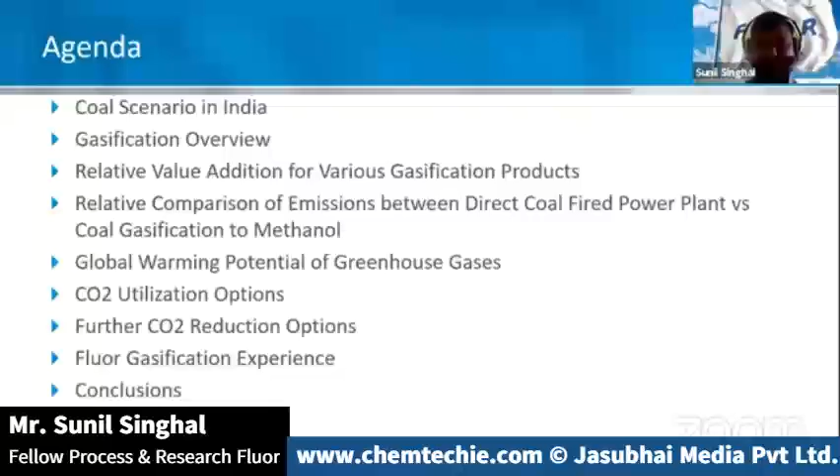So the coal scenario in India: this is a very well-known fact that India has the fourth largest coal reserve in the world, about 350 billion metric tons. We are at the same time the largest consumer as well as the second largest producer of coal in the world.

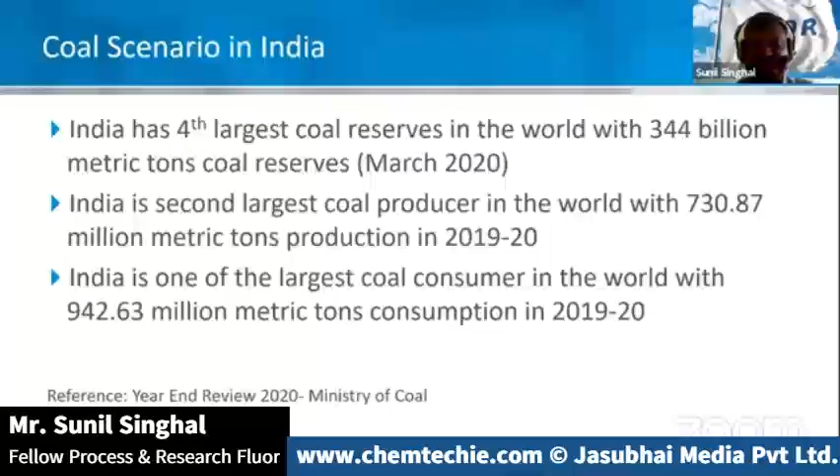So what is the drawback? The majority of Indian coal is low grade with very high ash content, and the presence of fluorides makes it very difficult to deal with. It also has a very high ash fusion temperature, which makes it quite difficult to gasify because you need very high temperatures. Most of this low-grade, non-coking coal is used for power generation using direct-fired boilers, which directly adds all the carbon in the coal in the form of CO2 into the atmosphere.

But the positive side is that coal does not have a direct parity with other fuels such as crude oil or natural gas. It has its own market, which is dependent on its own supply and demand situation.

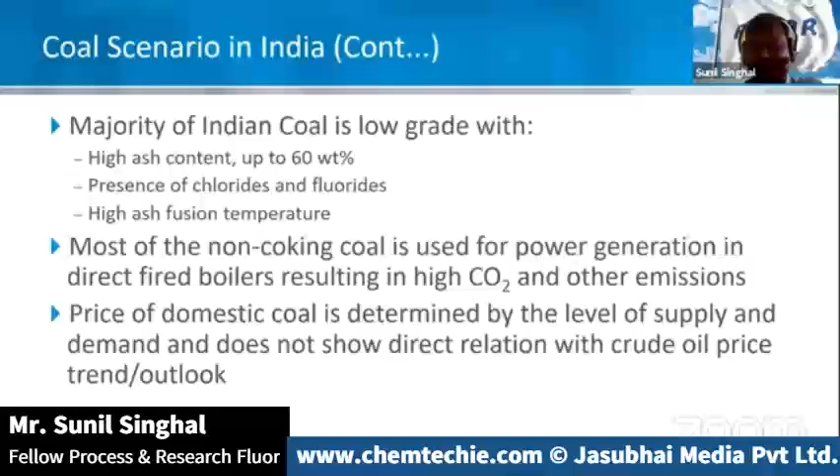A little bit about the stats: 70% of coal used in India, in thermal power plants, accounts for close to 50% of CO2 and SOx emissions, about 30% of NOx, and 15% of PM 2.5 - all dangerous species. The Indian coal fleet emitted 1.1 gigatons of CO2 in 2019, and of course contributed to poor air quality and all kinds of emissions in SOx, NOx, and particulate matter, impacting health, economy, and ecology directly or indirectly.

So what is the clean solution? We are sitting on abundant coal reserves, and yet we're still importing almost 80% of our energy needs through crude oil or natural gas. So with the emerging concerns over CO2 emissions and other pollutants such as NOx, how do we use this abundant coal in a cleaner way? I believe the potential cleaner solution is gasification.

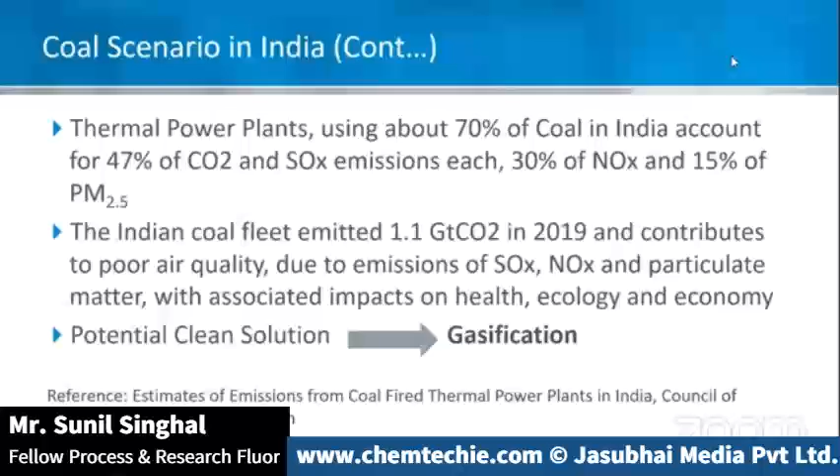Gasification is basically the reaction of the feedstock with oxygen and steam at high temperature. The primary gasification reactions aim to produce carbon monoxide and hydrogen. In addition, there are some side reactions, such as the water gas shift reaction and methanation, which produce CO2 and methane. Typical conditions are 900 to 2000 degrees Celsius, and pressure could be atmospheric to about 85 bar gauge.

In addition to the main hydrogen and CO, which is called synthesis gas, in the coal gasification process, the nitrogen present in the coal, as well as the nitrogen that comes with oxygen, is converted into nitrogen, ammonia, or HCN, depending on the gasifier operating conditions. Sulfur is converted into H2S, COS, and CS2. And then, as I talked about earlier, there's chloride, fluoride, and some metals like mercury and arsenic - those also end up in the syngas.

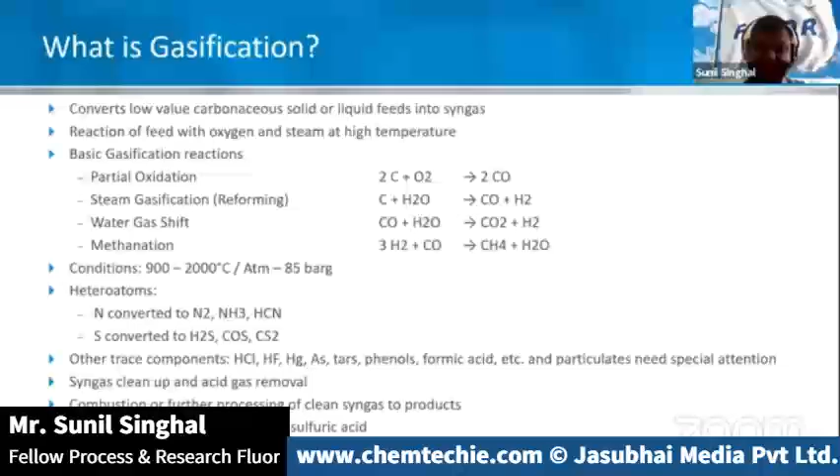Those things need special attention, and the design needs to take care of them. Otherwise, they can create a lot of problems in downstream processes. So we've got syngas cleanup and acid gas removal steps, and then the end product depends on what it is. If it's syngas, it could go to direct combustion using the IGCC route to make power, or syngas to make other products. Sulfur gives an opportunity in this case to be captured in the form of elemental sulfur or sulfuric acid, as opposed to SOx in the case of boilers.

Feedstock-wise, gasification is very versatile and can take a wide variety of feedstocks, including high-ash Indian coal, petcoke, other refinery residues such as vacuum bottoms, asphaltenes, acid-soluble oils, and also various biomass such as municipal waste, woody biomass, agricultural waste, industrial hazardous wastes, and even medical wastes.

It's very important, considering there are all kinds of species present in the feedstock, to understand the feedstock in order to pick up the right technology, the right syngas cleanup steps, and the right gasification plant configuration.

Some of the key parameters are the heating value (LHV), moisture content of the coal, ash content, and ash composition. These determine the composition of the bottom ash or slag from the gasifier, and the split of ash components, some of which get carried over in the syngas. Then there's the melting temperature, and most important—often ignored if you're not experienced enough—the trace components.

These trace components may be at ppm levels but are very dangerous to deal with. You need to pay special attention even down to the ppm levels of mercury, arsenic, sodium, potassium, chloride, fluorides, and other halides. And of course the grinding index, since hardness is measured in terms of the Hardgrove grindability index or the Bond index.

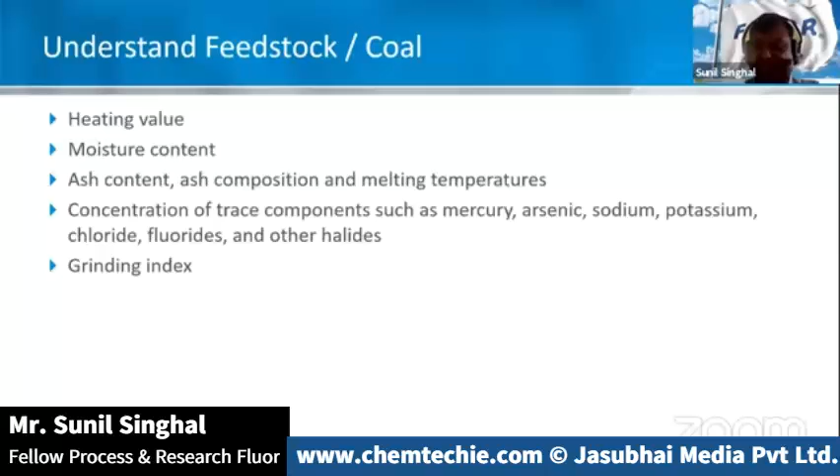Here is a simplified overview of the key process steps in the gasification process. We have an air separation unit which provides pure oxygen, close to 99.5% or higher purity, for gasification.

Then we have the gasification block itself along with heat recovery. Heat recovery is optional depending on the technology—it could be a direct quench or a heat recovery steam generation option.

Then the raw syngas that comes out of the gasifier, after cooling, needs to be scrubbed for any chloride or fluorides. Conditioning essentially means the shifting, or the COS hydrolysis, depending on what the end use is.

After conditioning, it goes through the acid gas removal step. If mercury is present, there is a mercury removal step before acid gas removal as well.

Acid gas removal separates sulfur and CO2. Sulfur is separated as H2S, which could be further processed to make sulfuric acid or elemental sulfur. The beauty of this CO2 is that it's concentrated, essentially pure CO2, so it does not need to be captured.

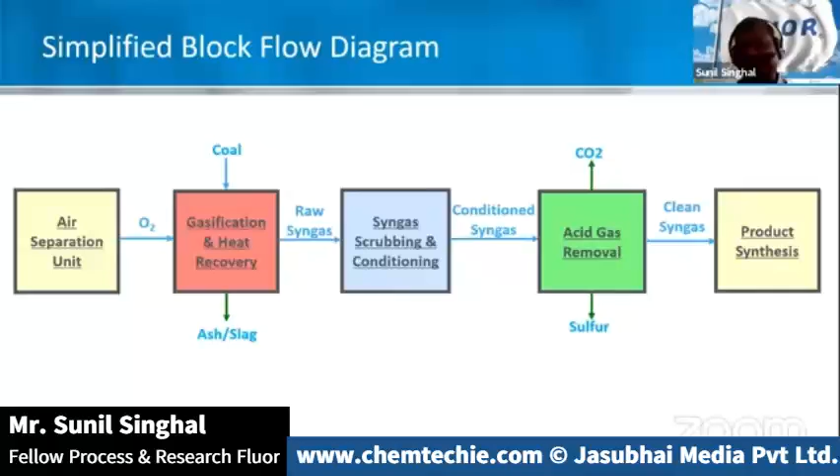Clean syngas can then be used to make a variety of products. Regarding gasification technology options, there are a number of options, primarily categorized into three main categories: fixed or moving bed, fluidized bed, and entrained bed.

Fixed and moving bed has very high residence time, fluidized bed is somewhere in between, and entrained bed has very little residence time. Based on the flow profile, you can see the feedstock size becomes finer and finer as we go from fixed bed towards entrained bed.

The oxidant could be air or oxygen, depending on the end use. In entrained bed, it is mostly oxygen, because you have to heat the coal to very high temperatures to melt the ash. If you use air, a lot of your energy goes into heating the nitrogen that comes along with it, meaning a lot of additional CO2 generation.

Ash handling could be slagging or non-slagging. Fixed bed has both slagging and non-slagging options, fluidized bed is non-slagging, and entrained bed is always slagging. Here is a list of commercially available technologies in the market.

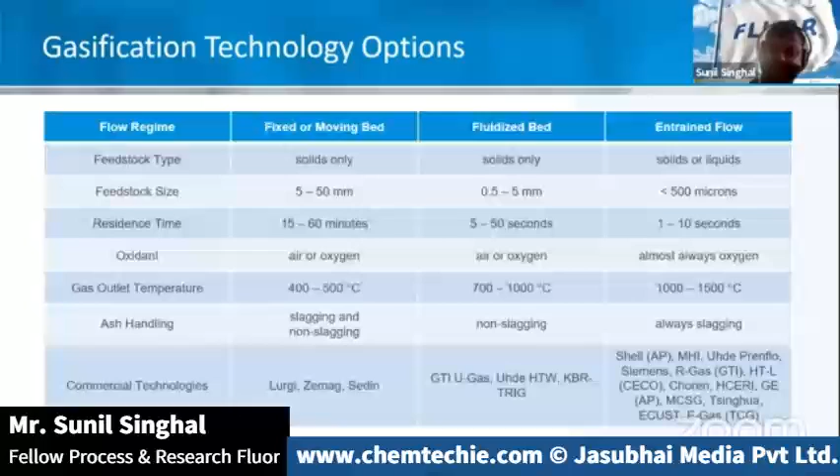Once you reach the syngas stage, you've opened the door to a number of products you can synthesize from it, including direct use of syngas for power and steam, using syngas for direct reduction of iron, as well as using syngas directly as oxo-gas for oxo-chemical synthesis.

It's also a source of hydrogen for refineries and oil sands projects. Oil sands is not applicable in India, but it can still be used as a source of hydrogen for refineries, such as Reliance is using. Then there are all kinds of liquid fuels, synthetic natural gas, methanol—which again opens the door for various derivatives—and fertilizers.

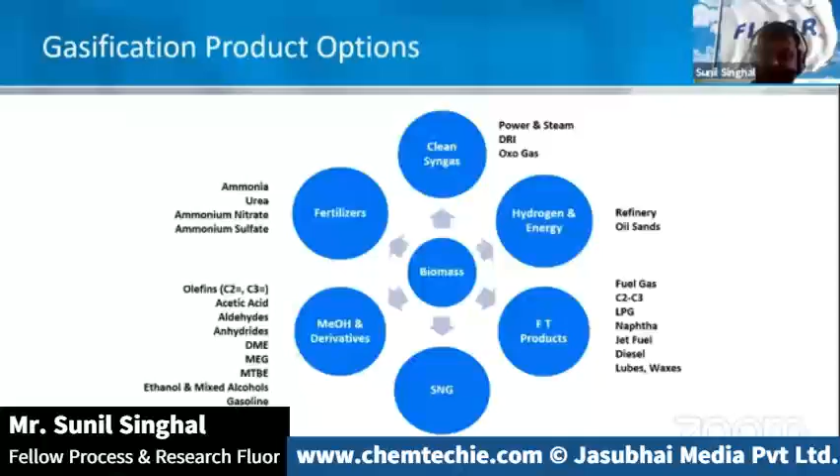This may be of interest to you: I've tried to compare the value addition of various products with respect to the cost of coal. Fluor has come up with a way to simplify things—$1 per million BTU corresponding to $1 per ton or $1 per liter prices. On an energy basis, you can see the value addition.

To summarize this slide: for coal converted to anything you synthesize, the highest value addition is essentially where you get paid for your carbon as well as for the oxygen. The moment you go into the rejection process of carbon or oxygen, your value addition drops.

So basically, what I'm trying to say is make the oxygenated products and the products which are rich in carbon, so you can lock most of the carbon in the coal into the product. That way you also help the environment by locking most of the carbon in the coal into the products and reducing CO2 emissions to the atmosphere.

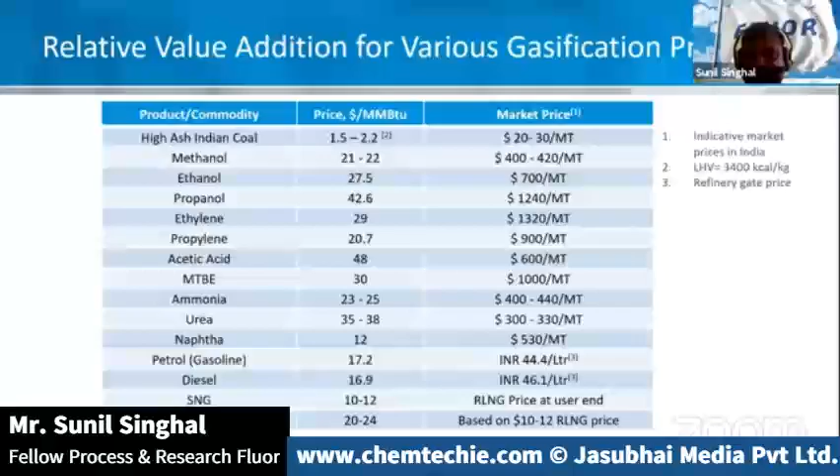Okay, so this is a small comparison about how 1 million ton of coal processed in a coal-fired power plant versus the same amount of coal processed to produce methanol. You can see the CO2 emission, there is close to a 30% reduction in CO2 when you process 1 million ton coal to make methanol instead of power.

SOx emissions become almost nil versus quite significant in coal-fired power plants. Similar is the story with NOx. And for mercury, chlorides, fluorides, particulates, there is essentially no way to capture them in the flue gas. While in gasification, they are captured in the purification process and do not pose any environmental hazard. Even the ash content gets reduced quite significantly.

Because in coal-fired power plants, the carbon conversion is much poorer compared to gasification plants. In addition, for coal-fired power plants, in this case, I've compared the circulating fluidized bed boiler. There, if the sulfur is high, you need to use limestone as well, so that limestone also ends up in the ash. That's why ash content is very high.

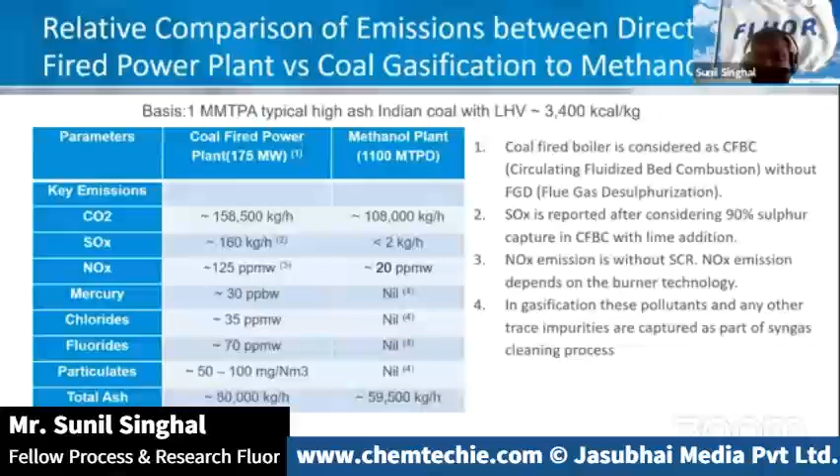This slide talks about the greenhouse potential of various gases. Carbon dioxide, when measured, is measured on a scale of 1. Methane is 25 times more potent. Nitrous oxide is 298 times. VOC is 3.12 times, and carbon monoxide 1.57 times.

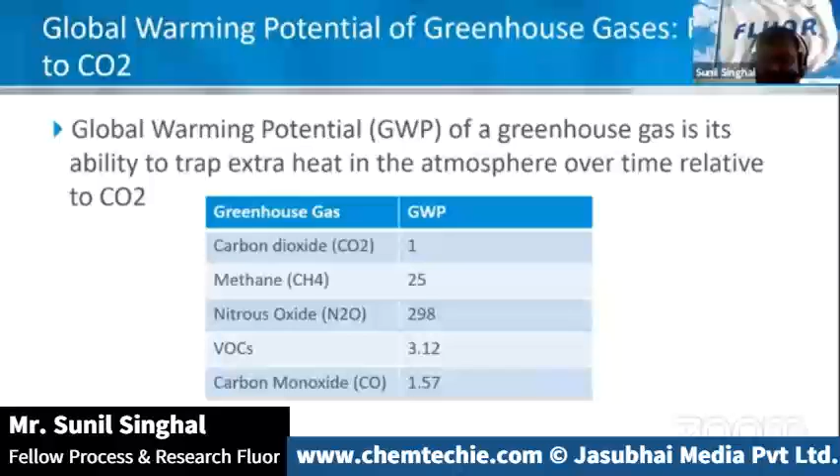Specifically in this case, coal emits coal bed methane, and even landfill sites used for dumping garbage emit a lot of methane. Methane emission is 25 times, so 1 mole of methane is equal to 25 moles of CO2. Similar is the story with NOx. There are other pollutants also that contribute quite significantly, even though they are emitted in small quantities.

Sunil, can you conclude in the next 2 minutes, please?

Okay, sure. So as I talked about, CO2 is capture ready, so there are various uses. We can use enhanced coal bed methane recovery, enhanced oil recovery. We can use it in beverage and food processing, dry ice.

And nowadays we have green hydrogen, so CO2 from the gasification industry can be combined with green hydrogen to make methanol. Similarly, the byproduct nitrogen from ASU can be used to make green ammonia using green hydrogen, and urea synthesis using the CO2 from gasification.

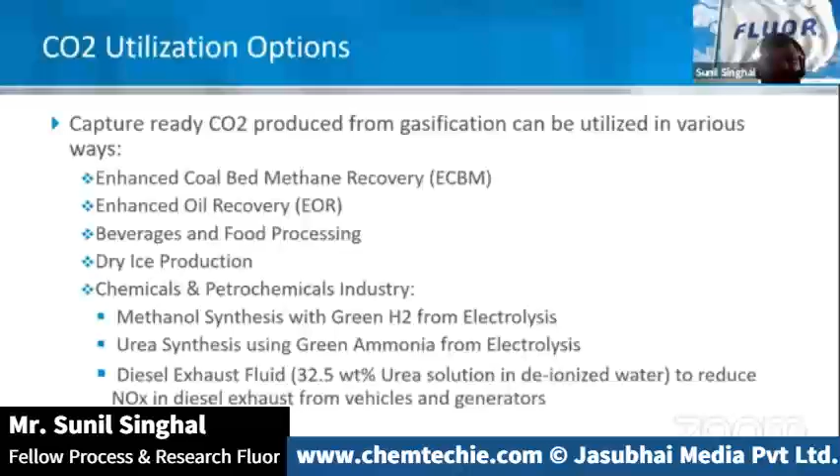In addition, in Western countries, especially Europe and US, there is something called diesel exhaust fluid, which is used to reduce NOx emissions from diesel vehicles. Another use is greenhouse farming, then algae growth, which can be further used for biodiesel production, then aerosols, dry ice pellets for sand blasting, removing some paints. It can also be used to neutralize alkaline water.

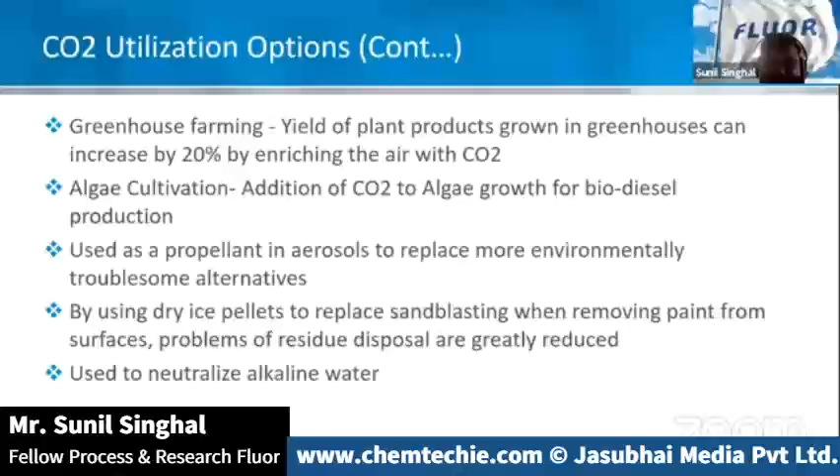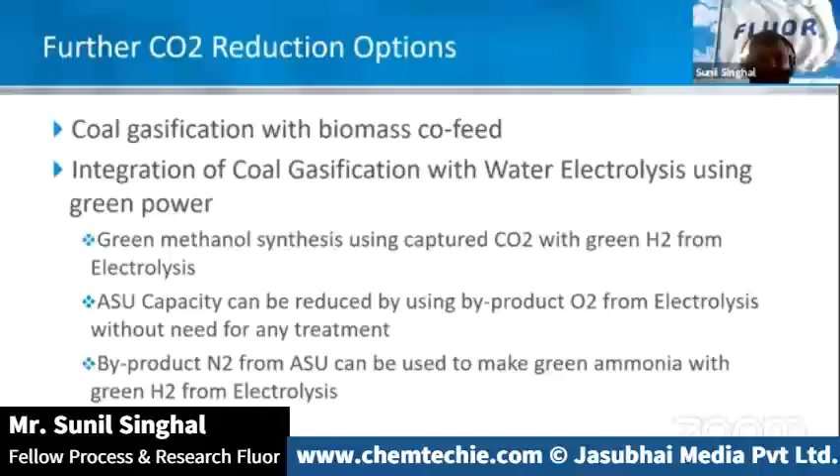So other CO2 reduction options are coal gasification. We can use biomass as a co-feed. Coal gasification can be integrated with water electrolysis using green power, so we can synthesize green methanol. And if these two concepts are combined, water electrolysis and gasification, we can have a very good synergy using the byproduct nitrogen from ASU to synthesize ammonia. Also, we can use the oxygen byproduct from electrolysis in the gasification, which serves the need for oxygen without requiring any treatment, removing or minimizing the capacity of the ASU.

We recently did a blue fertilizers, blue ammonia project for Utah, which is essentially CO2 capture along with ammonia, urea, and ammonium nitrate, various fertilizers. The captured CO2 will be pipelined and used for enhanced oil recovery.

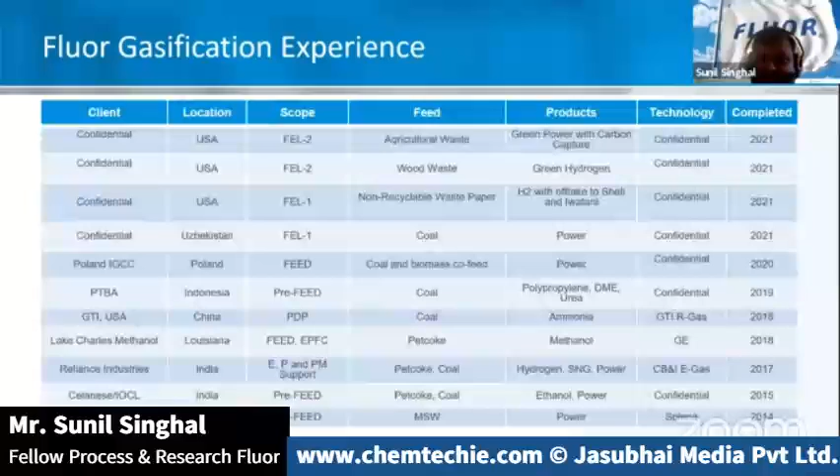This is a long list of experience. Fluor has been in the gasification industry since the 80s, starting from Sasol 2. And we built the world's largest petcoke gasification plant for Reliance in India.

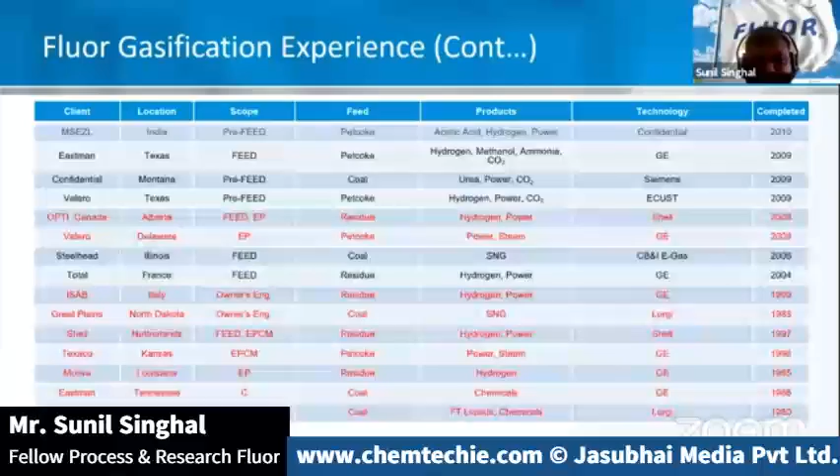Again, you can look at a lot of gasification plants that are still operating. To sum it up, basically, yes, gasification is complex and quite challenging, but coal is not going to go away from people's lives very easily, because worldwide, a lot of people are still dependent on coal. So we need to find an alternate clean use for coal, and I believe gasification is a technology that offers that opportunity.

The syngas cost of production is more economical compared to imported LNG in India. Even byproducts of gasification, such as sulfur, nitrogen, argon, sulfuric acid, can be utilized to generate additional revenue. More importantly, gasification plays an important role for energy self-reliance in India, with the demand for products, specifically chemicals, petrochemicals, and fertilizers.

Gasification also addresses the increasing global warming concerns due to CO2 in a much cleaner way compared to current uses, which is direct fired boilers. Gasification, of course, offers various blue hydrogen and chemicals, as well as fertilizer synthesis options. It offers good synergy with electrolysis.

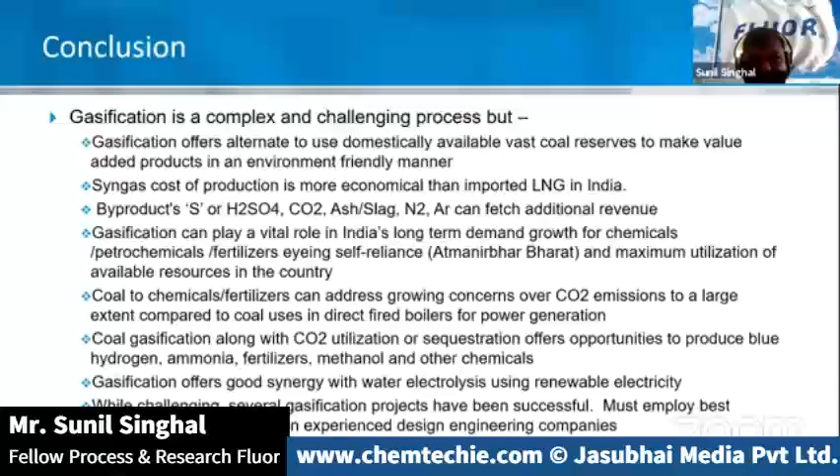So what is key for gasification success is we must use the best technologies and gasification experienced design engineering companies. A lot of people have been convinced with that, and they have successfully implemented and taken benefits of the gasification. I think with that, I will summarize. Okay, thank you.